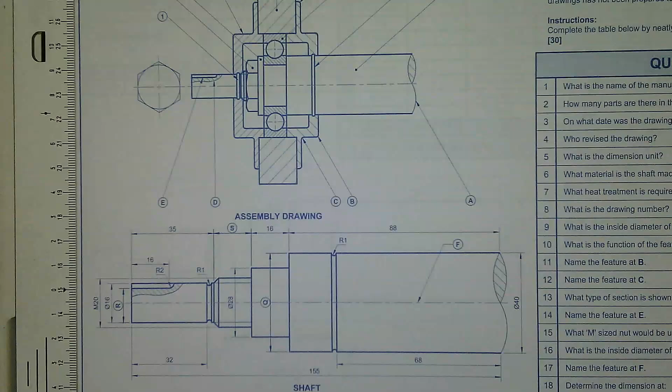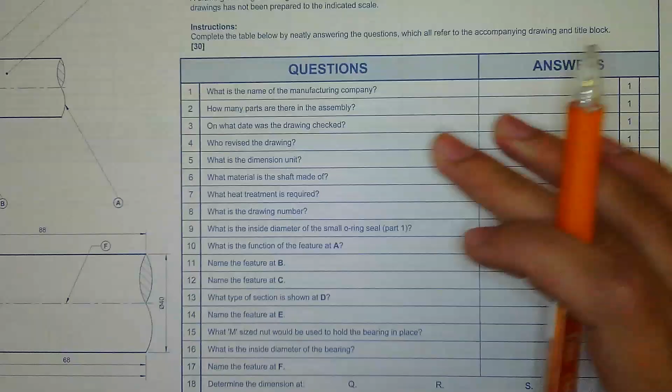Grade 10s. In preparation for the exam, let's do some mechanical analytical revision. So a mechanical analytical question looks something like this, where you have a given figure or a given assembly, and then you also have questions regarding that given figure. And most of the information in this question you are going to be able to retrieve from the actual figure and the information provided down here itself.

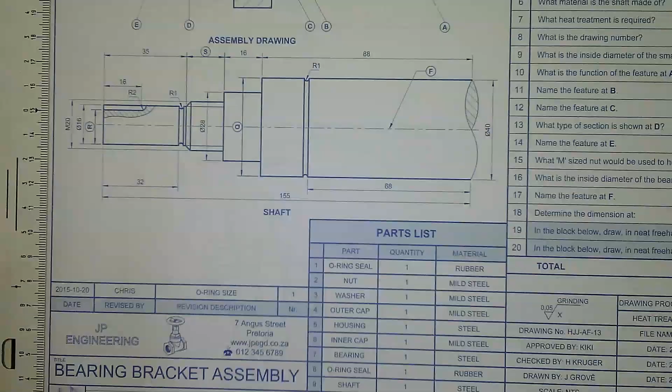So this is part of EGD where some study work is required, because you need to know what a rounding looks like, you need to know what a fillet looks like, you need to know what a shaft looks like. So this is part of our study work for grade 10 EGD. Now let's start with the questions. The first question asks us,

Sorry, my thing just fell from my desk.

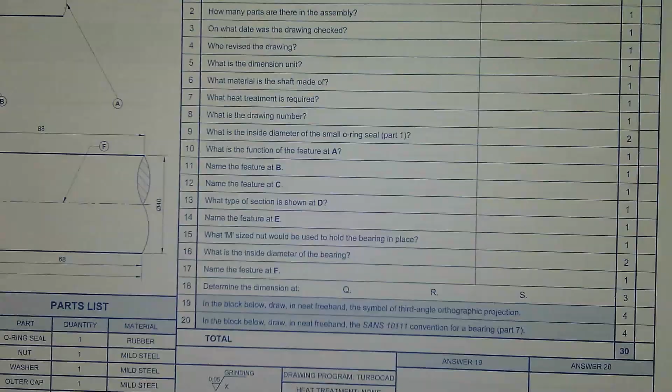The first question here asks us, what is the name of the manufacturing company? Now if we go take a look at the information that is given to us, you'll see that the manufacturing company in this case is JP Engineering. So then you go and you write JP Engineering. Remember, we only write in print in EGD.

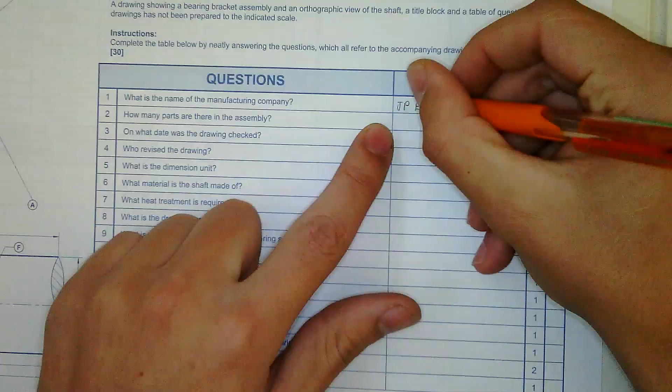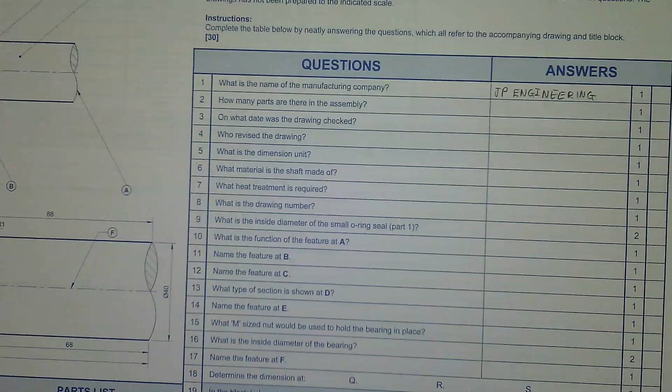Second question, how many parts are there in the assembly? And now you can physically go look at your given parts list, which clearly shows how many parts there are in this assembly. From 1 to 9, meaning that the total number of parts is 9.

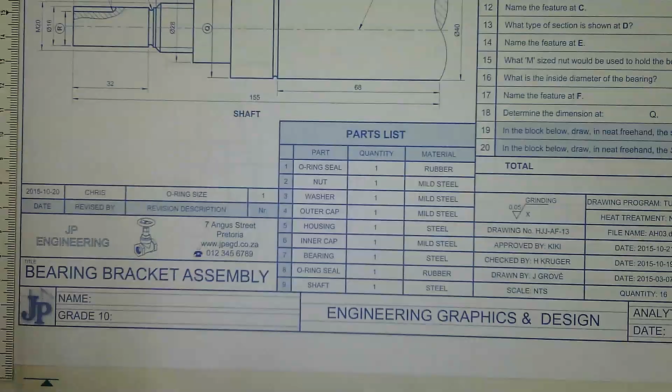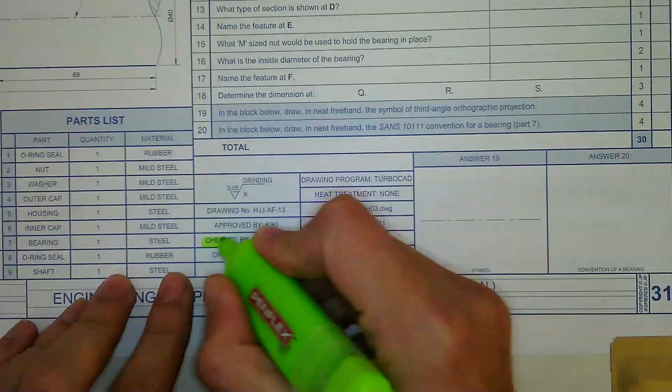Question 3, on what date was the drawing checked? Again, if we go look at our given information, we can see that there is a revised date, okay, not to be confused with the date checked. Over here is our date checked, right there, checked by H. Kruger, and the date 2015-10-19. So we write our answer 2015-10-19.

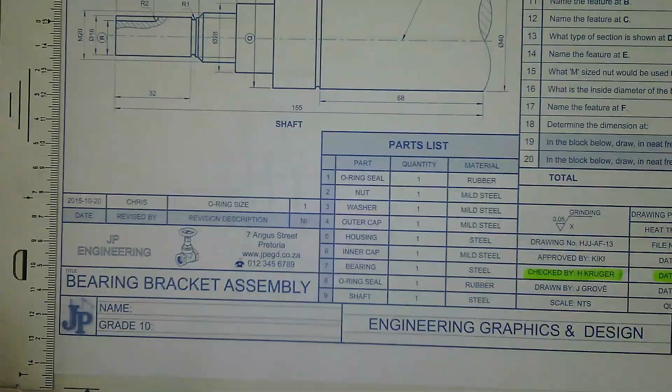Who revised the drawing? Now we need to go look at the revised list, and as we can see, Chris revised this drawing, given right there. And then you can write Chris.

Question 4, what is the dimension unit? And for the dimension unit in EGD, we can see that we are using millimeters in this scenario. So for dimension unit, you can write mm or millimeters.

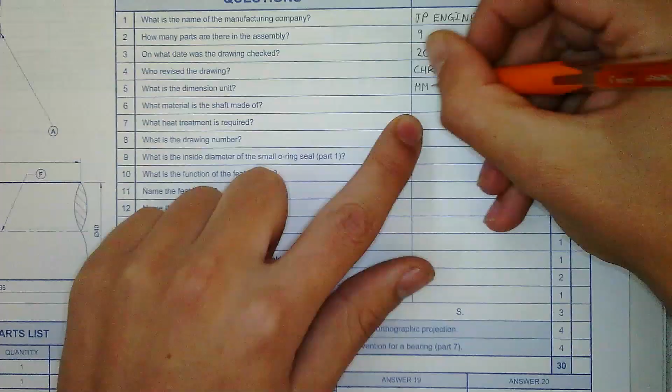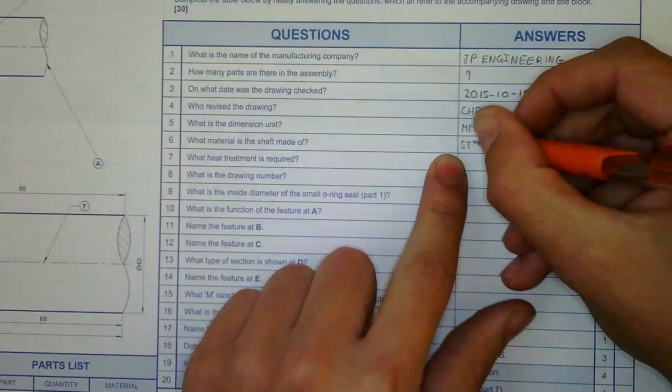Question 6, what material is the shaft made of? Now we can go back to our parts list, and we can see that our shaft is made of steel. So I can write steel. What heat treatment is required? Okay, again, now we go back to our information that is given to us. And right here we can see that heat treatment, none is required. So then we can go and write none.

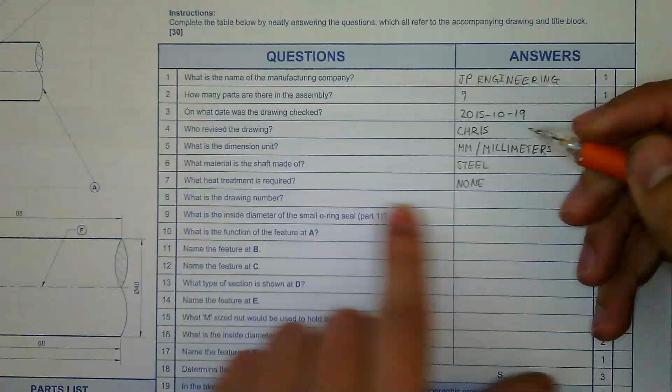What is the drawing number? Again, given information. If we look right there, we can see that our drawing number is clearly provided as HJJ-AF-13.

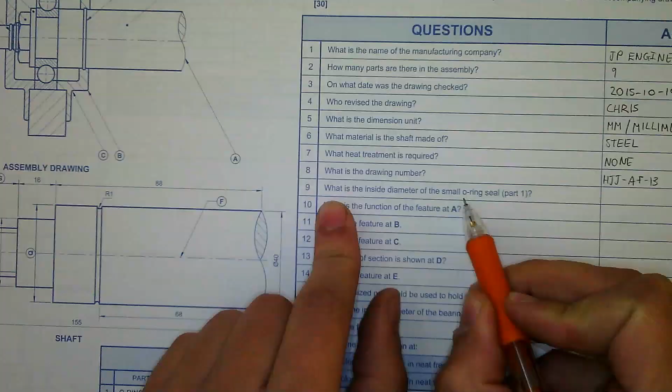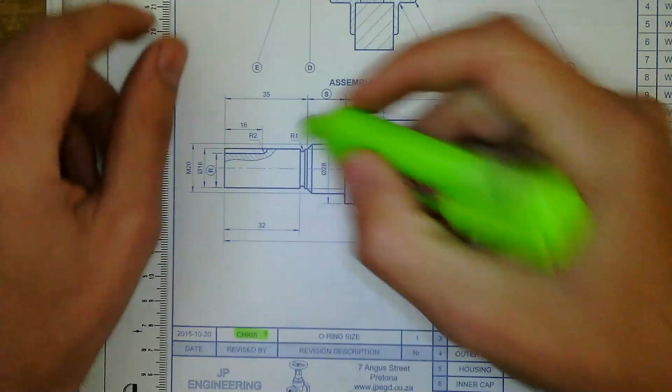What is the inside diameter of the small O-ring seal in part 1? Now where's part 1? Part 1 is, there's the O-ring seal. Now they want to know what the inside diameter of that O-ring seal is. If we look at our drawing, we can see that part number 1 is right there, our O-ring seal. And if we go look at this drawing, which has our dimensions, we can see that our O-ring seal

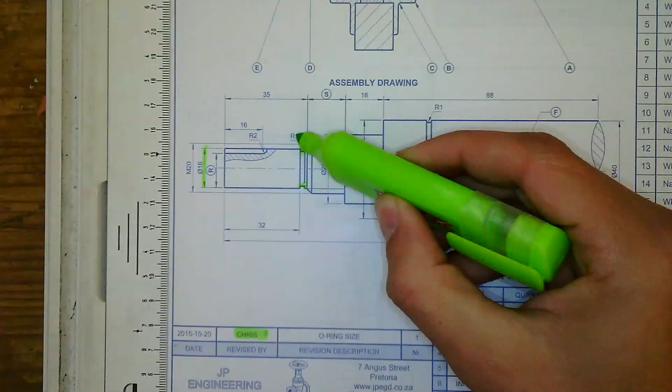sits on the shaft in a rounding with a radius of 1, and that shaft has a total diameter of 16. Meaning, if I want to know what the inside diameter of the O-ring is, I have to take 16 minus this one minus that one, and that will give me a diameter of 14. Remember to write the diameter symbol before you write 14.

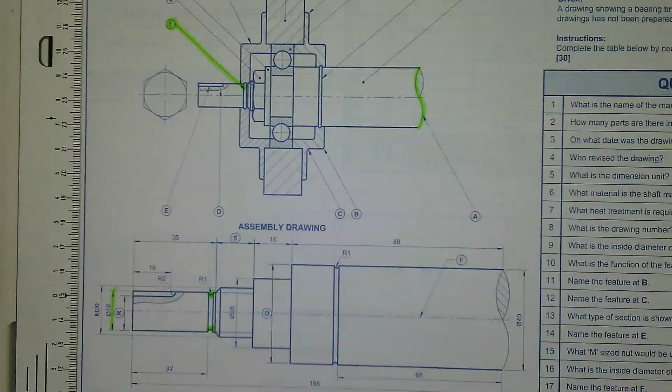What is the function of the feature at A? Now where's A? A is right there. This squiggly line at the end of the shaft. Now that squiggly line means that our shaft is longer than what is given to us. It means that the shaft extends past that point. So what we can write in our answer is that the shaft is longer.

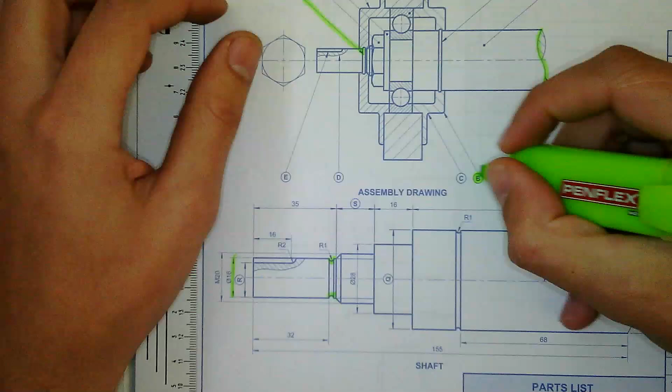Name the feature at B. Let's quickly find B. Looks like B is right there. B refers to that outside rounding. So that is a rounding. Now, there's a small catch here. Okay, so B is our rounding. Then they ask us what is the feature at C. So let's go look at C quickly. C is given to us right there.

Now, what is the difference between B and C? B is a rounding on the outside of a corner, and C is also a rounding but on the inside of a corner. And a rounding on the inside of the corner like this, that is what we refer to as a fillet. So C is a fillet.

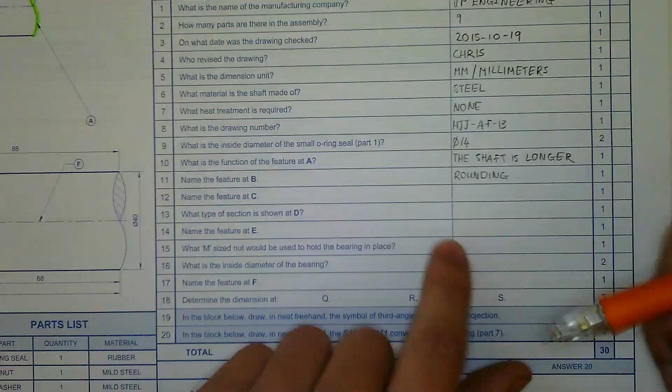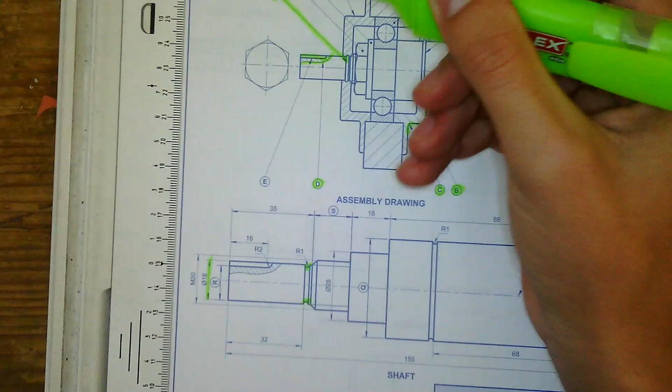13. What type of section is shown at D? Now D is right there. Now what type of section is shown at D? That shows us that inner keyway right there. So that is referred to as a part section.

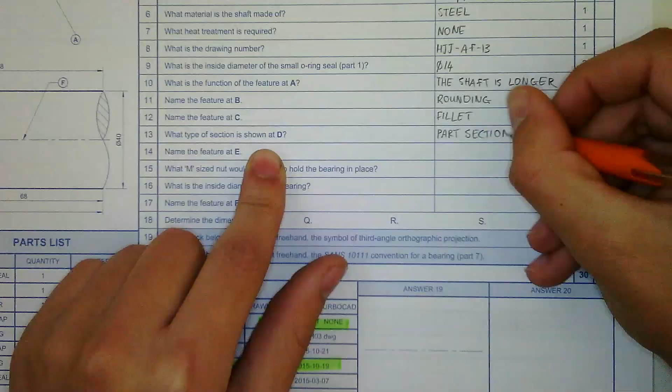Name the feature at E. E is right there. Okay, so E is referring to the keyway, meaning that E is a keyway. A keyway is a small groove in which a key lies in a mechanical assembly. So E is a keyway.

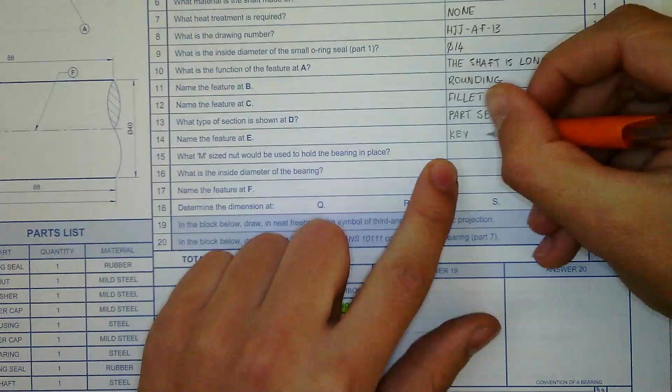What M size nut would be used to hold the bearing in place? Now, if we look at the parts list, we can see that the bearing is part number 7. So let's go look at where part number 7 is. Part number 7 is that thing right there.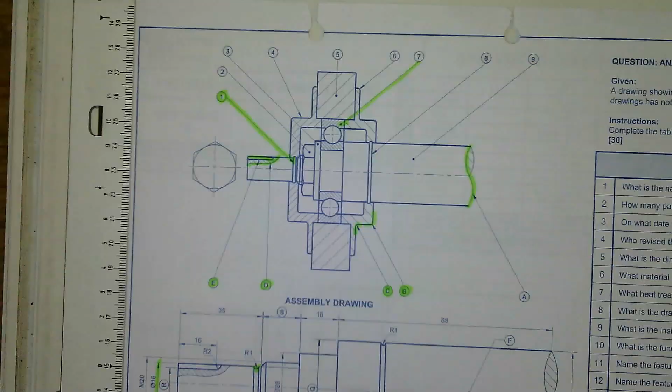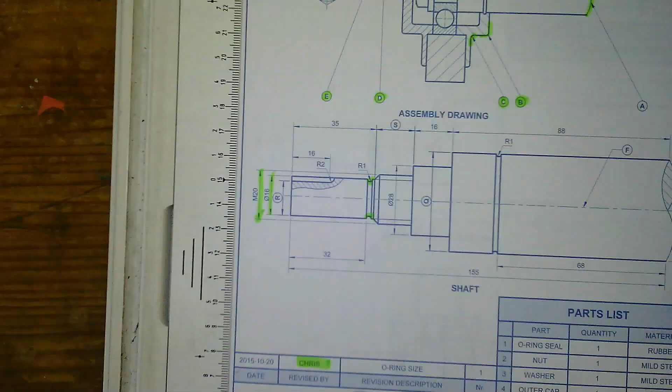And if we look at the nut that is required to keep that in place, we can see that it is an M20. Okay, it is an M20 nut that will be used to hold that bearing into place, or to hold that plate in its place. So for question number 15, we write M20. Remember to write the M in front.

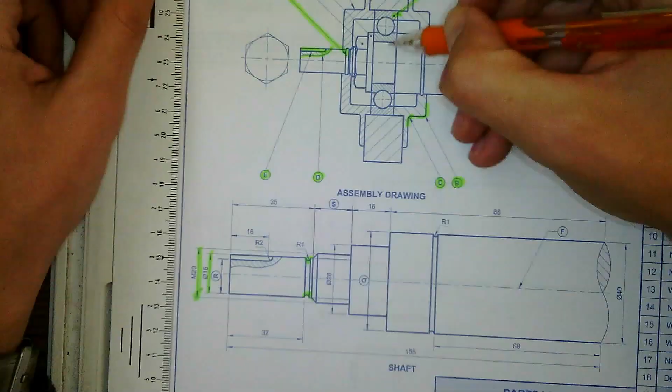16, what is the inside diameter of the bearing? Okay, so again, now we need to look at the bearing. The bearing is right there. This entire thing is the bearing. We know it's a bearing because, remember, in a ball bearing we have small balls that cause the bearing to freely run, to smoothly run. So that ball represents the bearing, and this is how our bearing is represented when it is sectioned.

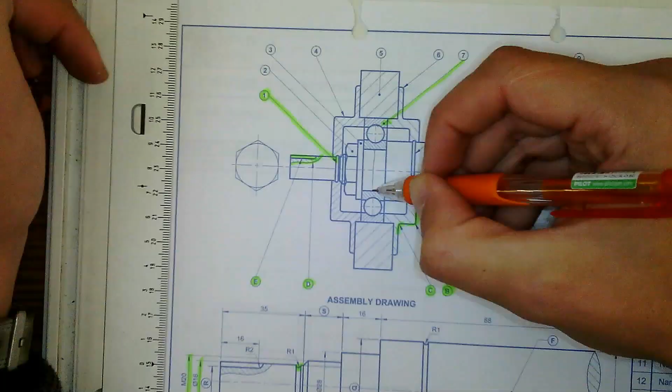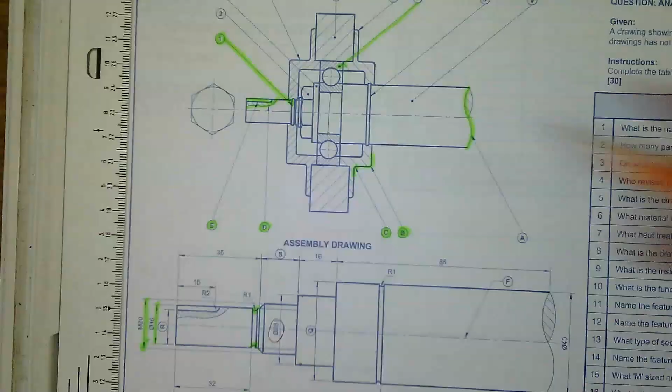Now they are asking what is the inside diameter of the bearing. So first we need to find out where the bearing will sit. We know that the bearing will sit right there, and if we have a look, we have an inside diameter of 28. So from there to there is given as 28, meaning that the inside diameter of our bearing will also be a diameter of 28.

Name the feature at F. Where's F? F is right there, pointing to that line. Now that you all should know, that is called a center line.

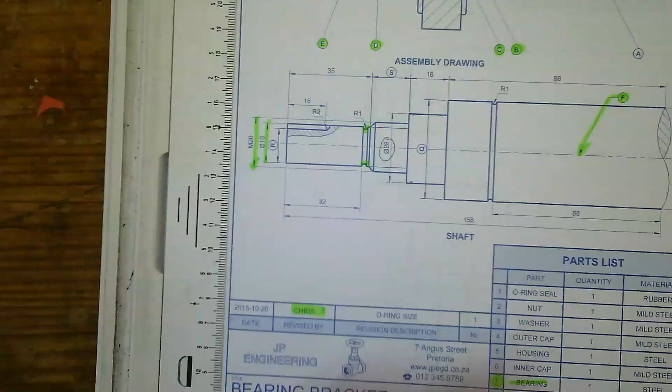Now they ask us to determine some dimensions. The first one is the dimension at Q. Q being right there. Now, if we look at the given information, we can see that Q will be the same as the dimension given right there. It's on the same level. You can line it up with your ruler, meaning that Q will have a diameter of 40.

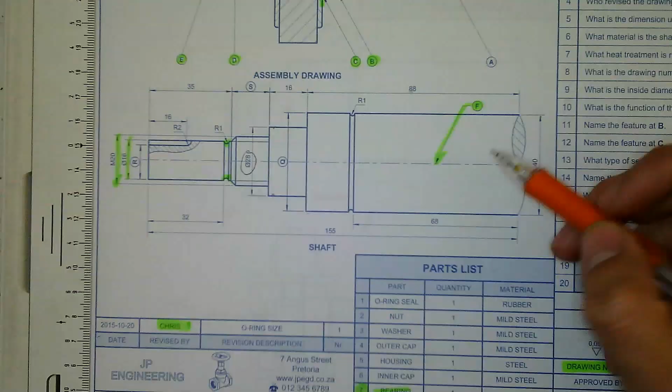Why a diameter and not just 40? Because remember, this is a shaft. It is a cylindrical object. We know that it's a cylindrical object because we can see this section line right there. That tells us that it is a shaft. And a shaft is round, meaning from there to there will be a diameter.

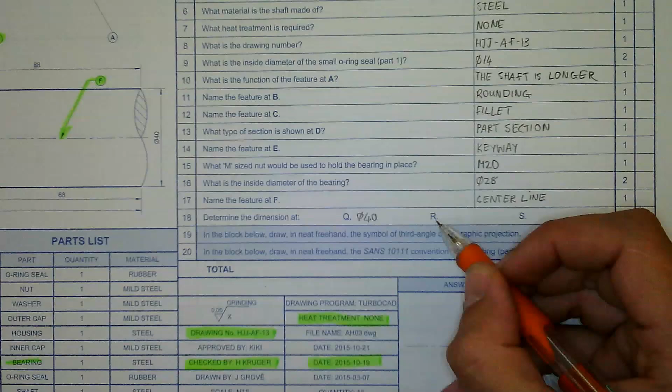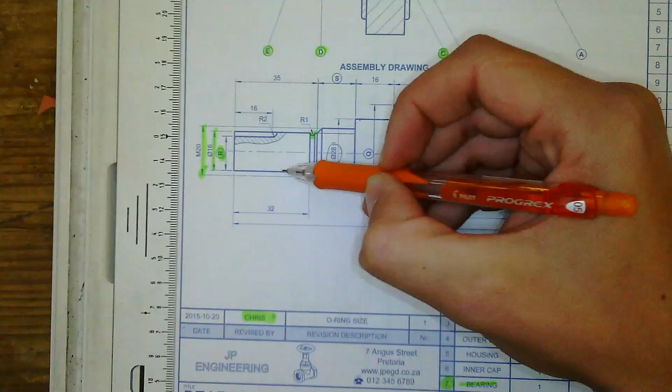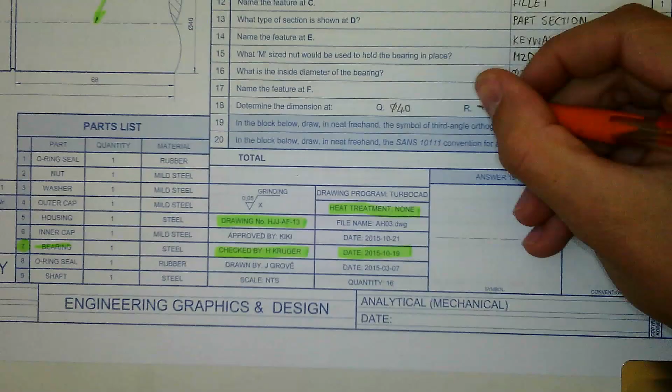Now, the dimension at R. Where is R? R is right there. What is the dimension at R? If we have a look at the keyway, the radius for the keyway is given as 2, and the diameter for the shaft is given as 16. So we have to take 16, subtract that 2, because they want to know the distance from there to there, and that will give us 14. And this is not going to be a diameter, because we are not measuring from the center of a shaft anymore. So we cannot write it as a diameter.

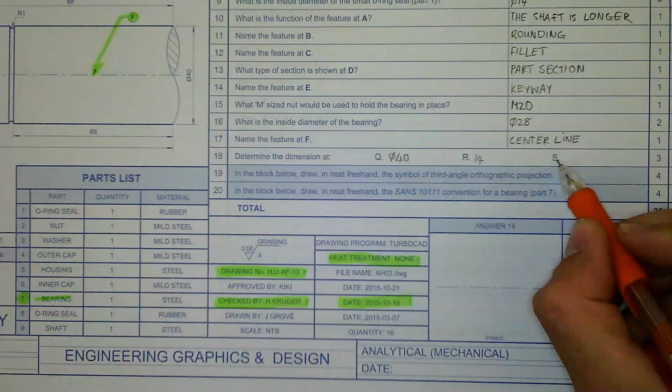Still question 18, determine the dimension at S. S being right there. To determine the dimension of S, we can take the complete distance at the bottom given as 155. We can minus 88, minus 16, and minus 35, and then we will be left with 16. So S will be 16.

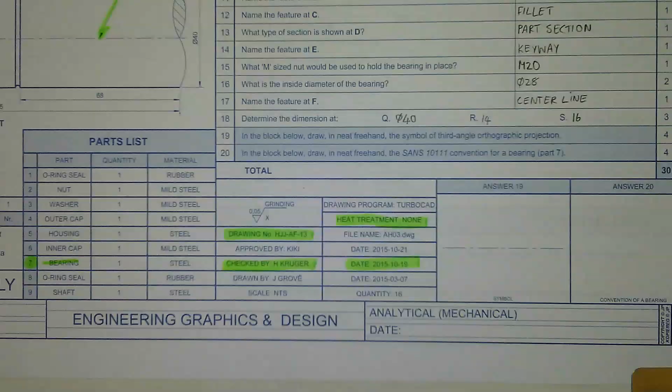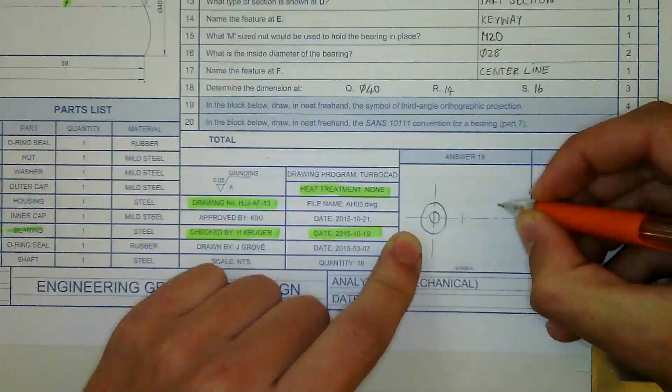Question 19. In the block below, draw in neat freehand the symbol of a third angle orthographic projection. I'm going to start off with my center line, and then remember, you have a small circle, you have a bigger circle of the cone, and then you have the side view of your cone.

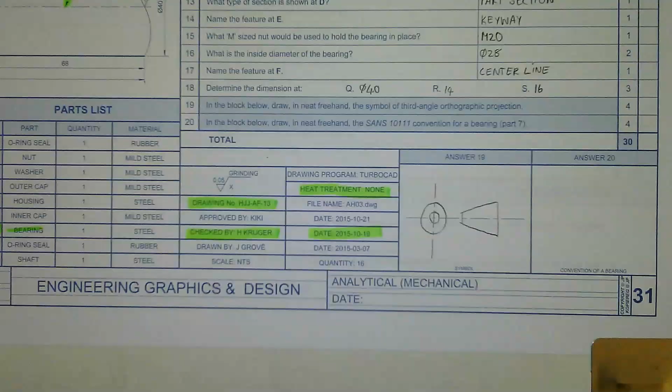Question 20. In the block below, draw in neat freehand the SANS 10111 convention of a bearing, which is part 7. Now if you look at the SANS convention for a bearing, it's going to be this symbol. You have a large rectangle, 2 squares on the side. Those squares have X's in them, indicating the bearings. And remember, because it's a bearing, it's a round object, it has a center line.

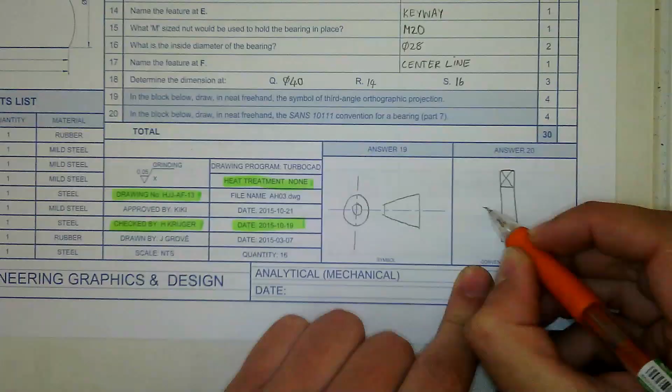And that concludes this mechanical analytical question.